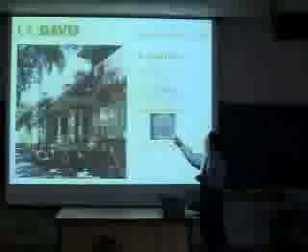Now remember, this is when the quad was still a farm field, so there's great old photos of the quad as a farm field. And you won't see any existing buildings on there in this plan. So North Hall, South Hall, those were all temporary buildings, dorms that were put up really fast to get the campus started. So those are right here. In the 1920s, they said, well, that'll be replaced by a big institutional building. So anyway, it's really fun to look back at some of these things.

So we took inventory of the development history and then laid out some of our challenges and opportunities going forward. A lot of that for us at this point in the university's development is about intensifying the central campus development. So even though we've got this 850 acres, the central campus where the academic, instruction, and research part of the campus is about 250, and that's big enough, because if it gets much bigger than that, the kind of interaction we want to keep between disciplines, between students and faculty, and from one disciplinary area of campus to another starts to erode if that gets too big.

So even though we have more land in the central campus than that, we want to keep the academic part of the campus compact. So a lot of what's laid out in this plan is infill development, compact development, intensification, taking out low-rise buildings and surface parking lots and putting in larger buildings and new open spaces to create a more compact campus.

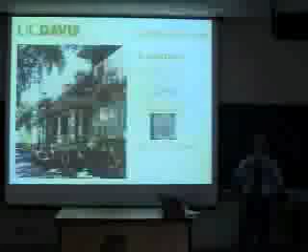And it's actually one advantage we've been able to use over the years, and it is that package. If you take out a parking lot or a low-rise building, but you can put back a taller building and a great open space that people can use for a gathering area among several buildings, then it works. If you just put the buildings side by side, there would be an urban character to this that I don't think would be in keeping with the heritage of UC Davis, but I think we can do both successfully.

So this is kind of a fun aerial photo, pretty recent of the campus. You can see the Mondavi Institute for Wine and Food Science and the layout of the new vineyard right there along Old Davis Road. And that vineyard, by the way, is a teaching vineyard for the Department of Viticulture and Enology.

It's actually 10 1-acre plots of grapevines, and what they do is have students in that discipline plant an acre, and then on a 10-year cycle they can see the growth and development of the grapevines from years 1 through 9, and then they take out the 10th year of grapevines and start over. So there'll always be 1 acre turning over there, because it's not intended to get 60-year-old vines. It's intended to be a teaching resource for students and faculty.

So in putting this framework plan together, we laid out 5 organizing ideas for the central campus. I'll go through each one of those on this sheet, and then each one in a little more detail, and then talk about West Village a bit.

So what we tried really hard to do with these 5 organizing ideas is integrate sustainability values, planning concepts, and architectural and landscape guidelines. Instead of maybe the more traditional approach—here's the sustainability chapter that says do good, here's the plan for the campus, and here's the architectural guidelines—we tried to integrate all of them into these planning concepts.

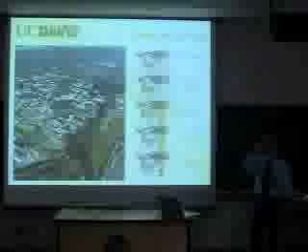And then the last one is how we connect to the outside world. At all these different entry points around the central campus, they're really different. This one's on the Davis community edge, that one's the old historic entrance from the north, there's a freeway entrance there, and another one down here off the Interstate 80 entrance. So different functions for how we connect to the local community and the regional community with this fabric inside the campus. So to go to each one of those in a little more detail...

Civic is not a word that you typically hear on a campus. You tend to think of city spaces when you hear that word, but the reason we chose that is because one of the unique things about the Davis campus is the incredibly high degree of participation of students, faculty and staff in the way this place runs and in the daily life of this place. That notion of civic life we have in a very strong way on the Davis campus. If you're going to do that, you need to create places to make that happen, or at least preserve places where that does happen.

The kind of public activity that happens on the quad is really rare and wonderful, and so we want to preserve that, and create other spaces like that for public life. In my view, you can't have a sustainable community unless people participate in it, care enough about it, to work for it. So that's what we meant by strengthen the civic core of the campus.

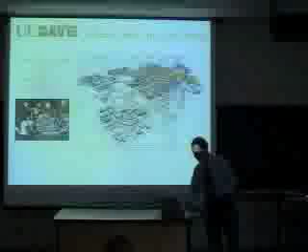If we can support that by the way we design and build and plan the place, then we think we're doing our job. So for that concept, that's the diagram that's in the report.

Again, it's a little bit different way of thinking about tying the campus together, all the way from the historic entrance on the upper left, which is north, past the Union and the Quad, and then taking those cork oak lined streets of the Quad and imagining bringing those all the way down and linking in to the new regional entrance from the south at the Mondavi Center. And the kind of spaces that get reimagined as you do that - right now the patio in front of the library blocks that.

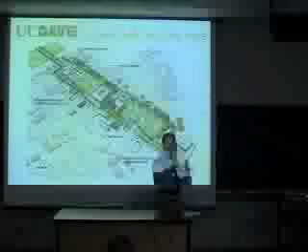You can't see that this happens to be a cork oak lined pedestrian mall over there, and then you've got cork oaks lining West Quad, but the way that library patio was designed, you can't tell. So we think we can do some strategic

surgery in here, come in and create these connecting places that make the campus feel much more whole, much more connected, and the connections to these civic places, which in my mind are the Quad and this big section of the Arboretum. Think of the Battle of the Bands on picnic day, and then this civic space down here, which is much more oriented to the external community. So connecting those places where public life happens on the Davis campus through this framework.

And then we go the next step, and I only give you one example, but in each of these areas, we identified the sustainability value, the big planning construct that ties it all together, and the dark buildings are potential either redevelopment or new building footprints. So this integrates a lot of those little diagrams that you saw in that first slide. It integrates where buildings go, where pathways and bikeways and roadways go, how new open spaces integrate.

When you break all those things apart into layers in a plan, it just kind of, you can do it, but it stops making sense as a place. So this is an attempt to integrate all that back. Those little diagrams kind of take it all apart again and show one idea at a time. So what's the bike network look like? And that intersects this whole thing. So it's back and forth.

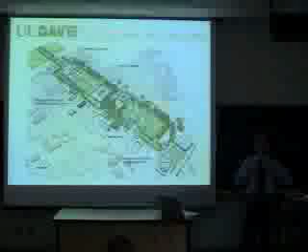And then in each area like this, we said, what's unique about the civic core? Well, it's got these big civic buildings. It's got unions, libraries, performing arts centers. Those are different kinds of buildings than an academic building like this one, than a recreation building, than housing. So what relationships should those big public buildings have to open space and circulation?

And so we actually lay out in each area what kind of architectural guidelines does it take for those buildings to help support this idea. And as a landscape architect, I have to tell you, it's great fun to do a plan where we're describing how buildings support the landscape-based idea, rather than what typically might happen, which is the building drives the design process, and too often landscape architects come in late. So creating this big framework that's land-based, landscape-based, buildings have a role, that was fun.

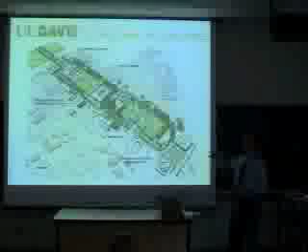But I mean, it's more than fun. It's how we make the place. And buildings have a job to do, in addition to what's inside, they have a job to do outside to create these good public spaces. So that's idea number one.

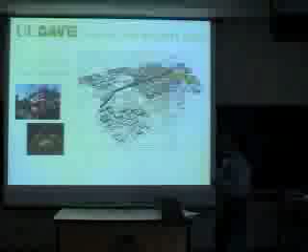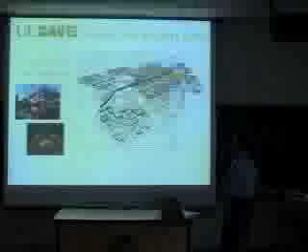And this is the diagram in more detail. So here's an idea that you may not have seen before. The first one I showed you, the north-south, that came right through Shields Library in the north-south direction, so left to right on the page. Now look at the front of Shields Library in an east-west direction on this transportation spine.

And there are a couple of new spaces on here that we're imagining in the plan. So this new transportation hub, this Unitrans terminal, has just been completed in the last year or so. Well, that is probably now the single biggest generator of pedestrian activity on the campus, because that's where all the buses let out, right? So that's where you all start walking after you get off the bus. So what happens when you go both directions from there? It's kind of a mess, right?

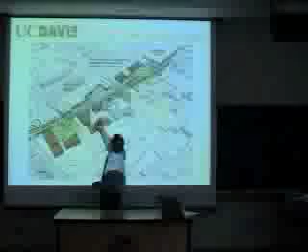I mean, there's a bunch of temporary buildings up there where it says street front building on a pedestrian promenade, and then you go this way, and there's a bunch of temporary buildings, and cars and buses and bikes and people pushing lab carts across the street. It's crazy. So this shows two new spaces, public spaces on either side of that transportation hub.

The one on top, where it says the Walker Promenade, we're actually, the building where it says street front building on a pedestrian promenade, that building is in design. It's called the Student Community Center. It was funded with a student referendum a couple of years ago. And so those, it is true, those temporary buildings on that corner are not long for this world. Been here how long?

35 years or so, so very temporary. But they're gone, we call them historic. If they were 50, we'd have to do a National Register investigation. They aren't, luckily. So there's a new building going there, and then there's Walker Hall.

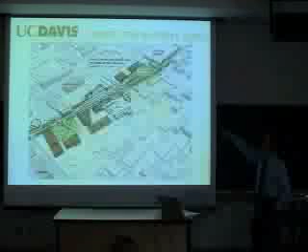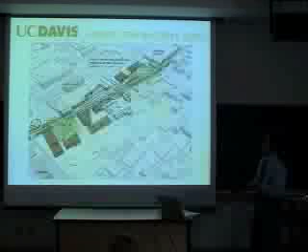The concept is opening up the entire middle of that block with a pedestrian promenade, a pedestrian walk, that from the front door of Shields Library will connect you right through that block over to the silo hub and to the silo. That will change the way the whole middle of campus feels. It'll be a very active street, with student activities in those buildings. So it's a very exciting prospect, and we're doing the first building.

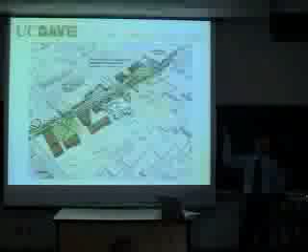And then one more project, and Walker Hall won't have anybody in it anymore, and then we have to figure out a way to renovate that and change the back of it so we can create this connector. When the library was built, the front door faced the quad, right? Makes perfect sense. But then it got added onto 3 times, and each time the door changed. So the last time it landed, they closed it on the 4th side, and that's where the door ended up, on the west side. But this is going to rationalize all that and connect to the west side of campus.

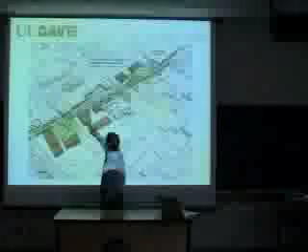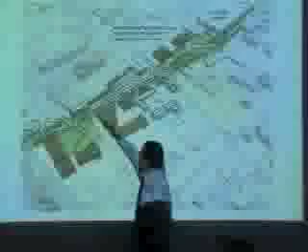So that's exciting. If you were to go there right now, that building with the space frame, that's right here. And then there's a building that sits right here, a little 1-story green metal building. This reimagines extending buildings connected to the silo complex over to this point, and then that goes away. There's big redwood trees in here, and new building footprints.

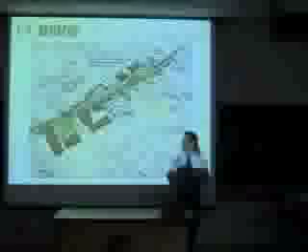Something that would take this part of campus, which is where the physical sciences and engineering disciplines are, and this part of campus where biological sciences and agriculture are, and connect those two with a new common quad on that side of campus. Because not everybody can have frontage on the main quad anymore, so we need a new space of activity like that, but connected back with strong pedestrian ways to that north-south civic core itself. So this is a really interesting potential for this part of campus.

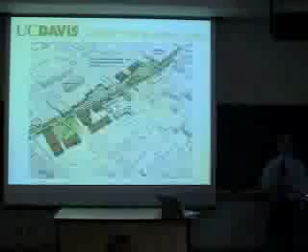It'll take a while, but I guess I've been around long enough now, working on things like this, to feel like they'll happen if they're strong enough ideas. And we'll find the opportunities to make things like this happen. So that's idea number 2.

Number 3 is to connect to the Arboretum. The Arboretum is a wonderful opportunity because it's an environment where the landscape is dominant, to try different things and different kinds of design. So the value we put there was integrating the built environment with the natural environment. Of course we try to do that whenever we can with the way we design buildings, but it's different when you're in a dominant landscape environment.

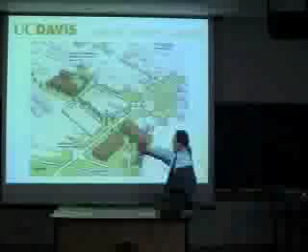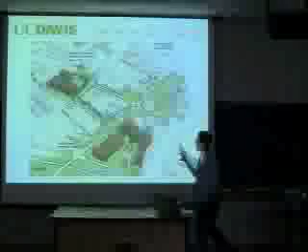The master plan, there's the water tower that you can see from I-80. This is where the facility service yard is, where all the shops are, and the storehouses and that kind of thing. So gradually those will move out, and we've got space for 2 more academic buildings to create this new campus green that collects these 3 buildings together and faces the Arboretum.

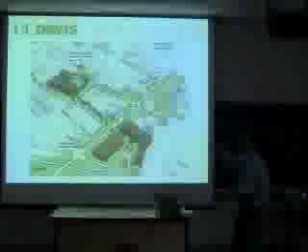And then this is an area over here, Civil and Environmental Engineering, that's Bainer Hall, and that site has a temporary building and an old 1-story building on it. That part of campus, I think, is kind of the toughest neighborhood in a way, because all the buildings are facing different directions.

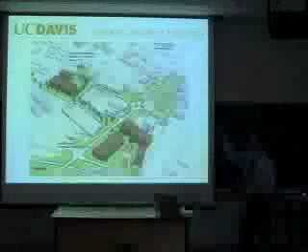And there's no sense of common gathering space or identity for that part of campus. A lot of the other parts have these nice green gathering spaces. That part doesn't. So that's the one opportunity where it says District Center, where at least 3 of those 4 corners, Bainer Hall, there's nothing you can do.

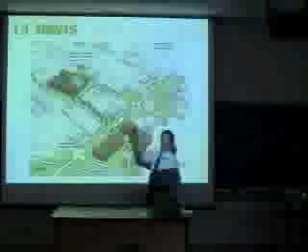Those big wings of Bainer Hall are big research wings, and they're back doors, and when that was built, that was the extent of the campus. It was like, we'll never need to do anything on that side. Everything's over here. That's the back door. Don't worry about it. Well, that never happens.

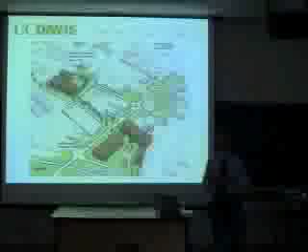But at least this building has a front door there. Kemper Hall has a door at that end, and we can redevelop that site to have front doors on what we're calling the district center and create a sense of identity and gathering. Again, that's taking a small parking lot and small temporary buildings and intensifying the building development, but bringing a good open space along with it.

So that's number 4. Number 5 is the connection to the rest of society, that the university is not an island in its own right. So when you think about sustainability, if we're just over here doing our thing, academically and otherwise, and it doesn't make a difference to the rest of the world, our sustainable prospects are not too good.

So we want to express that in the physical design of the campus too. We want to connect, we want to welcome people in. This whole development around where the Mondavi Center and all that, if you look at those things, those are all uses that have a pretty high degree of public attraction.

There's the Mondavi Center Performing Arts Center, new Graduate School of Management, which has regional business connections, Alumni Visitor Center, Mondavi Institute for Wine and Food Science, people pretty into wine and food. So there are things now where you used to just drive by and see the water tower. Now there are activities there that the public can come engage in, find out more about UC Davis.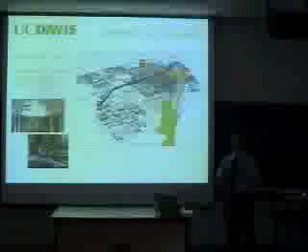That is part of the sustainability plan, folks. If we don't connect to the outside world and gain support and ownership, and if people don't think what we're doing is valuable, then resources will just continue to shrink. So we can actually design and plan the campus to support those big university goals.

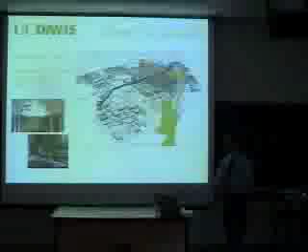And that's just a diagram of the different kinds of entry opportunities that we have as you march around Central Campus. So this is one example.

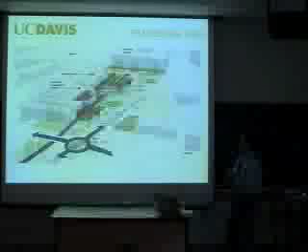I picked the Walker Promenade area, but where we diagram in the document, when you do a building in these important public places, it identifies what role the building should play with regard to those public places, and then it also starts to identify certain architectural guidelines.

I just excerpted some of the shading strategies that I think you've started to see more frequently in new buildings around campus that for a long time didn't happen at all. Pretty simple stuff, but an architectural style can grow, even though I'm not the campus architect, and the architecture on campus is, to be polite, diverse.

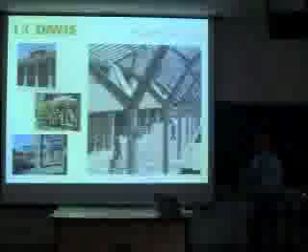Clayton Halliday is the campus architect, and through measures like this, saying there are common elements that can tie old buildings and new buildings together if they make sense for the climate and for the place, we can build a vocabulary and an identity for UC Davis architecture by starting with the climate and building from there. So you'll see a lot of new buildings and retrofits to old buildings taking on this kind of character.

So that's an overview of the Central Campus Framework Plan. How are we doing on time? We have about 17 minutes.

So I'm going to do a quick run through West Village and try to leave about 10 minutes for questions at the end, because West Village is a really big initiative. I know others have talked about it in this class, but I'll give you an overview, and from my perspective, what's particularly interesting about it from a planning and design perspective as we go forward.

So it's a new neighborhood for students, faculty, and staff on the campus, immediately west of 113. The reason we're doing it is basically to build a stronger UC Davis community.

The Chancellor, when we started our long-range plan back in 2001, looked ahead 15 years and said the City of Davis is not building hardly at all. We're going to continue to grow, and if we don't provide housing for students, faculty, and staff, then the distinctive character that the Davis community has for UC Davis as a college town is going to begin to erode, and we're going to turn into more of a commuter community. We should do something about that.

So West Village is the response to that. If you live there, you're going to have some connection to UC Davis, either you go to school here or you work here. We're pledging that we'll make the for-sale units for faculty and staff below market, though that's gotten harder as the market's gone below. But that's the pledge. It also includes a partnership with the Los Rios Community College District.

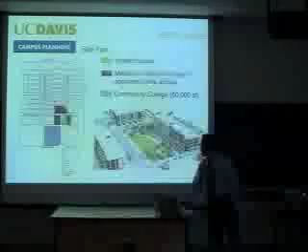So it's a small community with all the moving parts. This is the way it lays out. So 113 is right here, and here's Hutchison Drive, and the part that's under construction starts right here, right now.

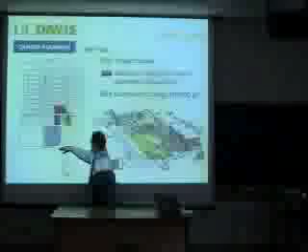So the village square is the heart of it, and this is an image of it. It'll have 4-story buildings with 3 stories of student rental apartments above, and a mixed-use ground floor that we hope—the bookstore is talking about doing a bookstore cafe annex out at West Village—and we want to try to put as much other attractions on the first floor so that we build a strong, vital community.

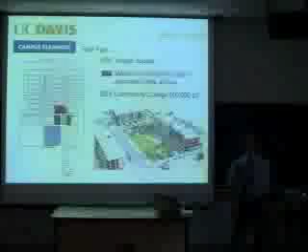The community college is on this corner, so we've talked to the community college and said, don't build a small food service inside the community college, push it out to the village square so everybody in the community can take advantage of it and it can help make things happen. The developer of the student housing would do a fitness center inside their building; we said, no, push it out to the village square.

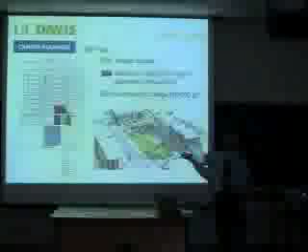So anything that might be a commons, just like these civic parts of the campus I was talking about—it's a little bit of the same idea out here, but more of a town planning model. That's the village square, and you can see it on the map. It's a green area, about 3/4 of an acre, a nice big open space.

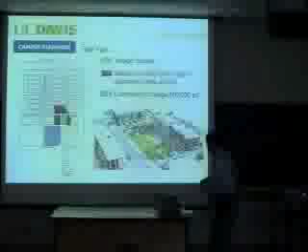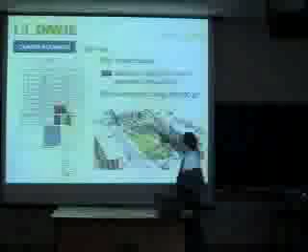The landscape design is actually really interesting. It's got a simple lawn gathering area that slopes very gently down. This area is high and steps down, and there's a natural drainage feature landscape right there that both of these landscapes drain to. So it's more of an urban application for the stormwater cleansing type of landscapes that more and more we need to do on the campus.

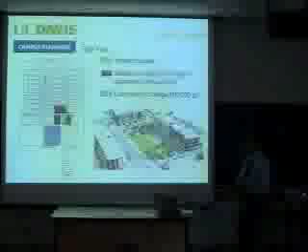So that's the village square. There's also student housing, built out for almost 2,000 students, and that's on that whole part of the neighborhood, and then faculty and staff housing up there. So the village square again is this place where hopefully everything comes together, with services and amenities for everybody.

And then there's a whole open space network, a whole natural drainage system on the site, so that it's all gravity drained. The only kind of weird thing is that the creek is down below, but the natural grade goes the other way.

I grew up in the Midwest where water flows downhill, but that doesn't happen here. The way it works here is we're on this plain that gradually drains from the Coast Range to the Sacramento River, and then this creek cuts through it, west to east, and when that creek floods, the banks get high. So the high points are right next to the creek.

So when a drop of water happens just on the other side of that levee, it never makes it to the creek—it kind of drains alongside the creek towards the Sacramento River. So the creek's down there, and the water is going northeast and southeast from the creek. So we did natural drainage with the flow, which ends up with all the water up the top.

In fact, if any of you went by after that first rain, there were kids swimming in it. A guy in my office, Carl Moore, went by and saw there were kids swimming in it, but he just looked away because he was afraid it was his kids.

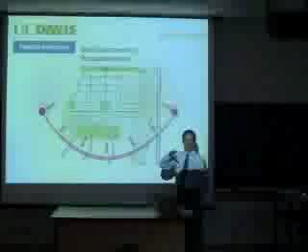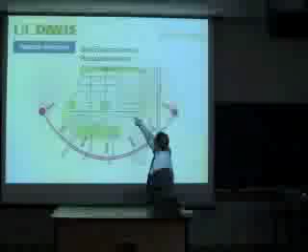I talked about the water system a little bit, now the transportation system. Unitrans, when we were doing the planning, said if we kept everybody within a 5-minute walk of the central bus spine, they could have a bus out there every 8 minutes or so, just shuttling back and forth to the central campus. So the bus would come over here, up to the village square, out here and back, and everybody's within a 5-minute walk.

So if you live at West Village, you don't get to buy a monthly parking permit. You can walk or bike or take the bus, because otherwise we're providing a parking space there and over here. So that's part of the idea. And I mentioned some of the solar access and cooling breezes—just some sensible stuff on the site planning.

And then for the energy strategy, working with our own Energy Efficiency Center on campus, we've got a very aggressive package of energy efficiency measures that we're building into all the buildings, reducing the energy demand of a building by almost 60% before anything else happens.

So the first part, we're actually working with a group from Chevron Energy Solutions that's putting together this plan for the developer. Most of West Village, apart from a couple of utilities, is all being done in partnership with a private developer, so it's been a very interesting and complex process.

Somebody from Chevron Energy Solutions, the renewable part of Chevron's operation, says that a negawatt is better than a megawatt. So the negawatt is the energy you don't use. So, real aggressive energy efficiency.

And then the key is to produce as much renewable power on site as we use. So if we reduce the business-as-usual demand for the neighborhood—I think it was 23 million kilowatt hours—it goes down to about 9.5 through energy efficiency. Then, with a very aggressive solar photovoltaic program and a biodigester fed by organic waste from the residence halls, the dairy, and green waste on campus, from those two sources we can create enough on-site local renewable power to match the reduced energy demand of West Village. So it's really exciting.